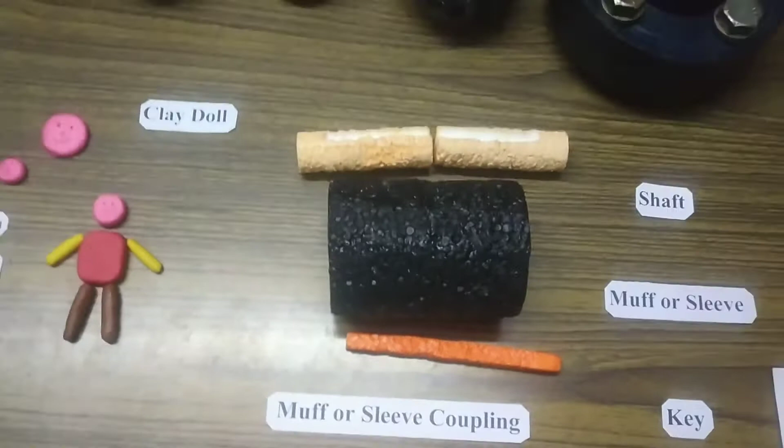So now to make you understand this concept of design, I'll take the example of a clay doll. Imagine I ask you to create a clay doll or design a clay doll. So basically what will you do? You will first create the body, then you will create the head, and then you will create the legs.

After you create the body, you need to make the head. You will not make the head too big or too small. You will not have a head which is so big, you will not have a head which is so small. What you will do is design an appropriate head, appropriate legs and then the hands.

So basically when you create a doll, first you make the body, then the head, and then the legs. The same way you will have appropriate values, specific dimensions to make the doll.

So in the same way, if I have a coupling, the coupling is basically a muff, and this muff is based on the shaft. So first you have to design the shaft. Based on this shaft we will design or create this outer muff. If I have a large shaft, I need to have a large muff. If I have a small shaft, I need to create it appropriately small in size, and then according to the shaft I'll create the muff, and with respect to both these I'll be creating the key.

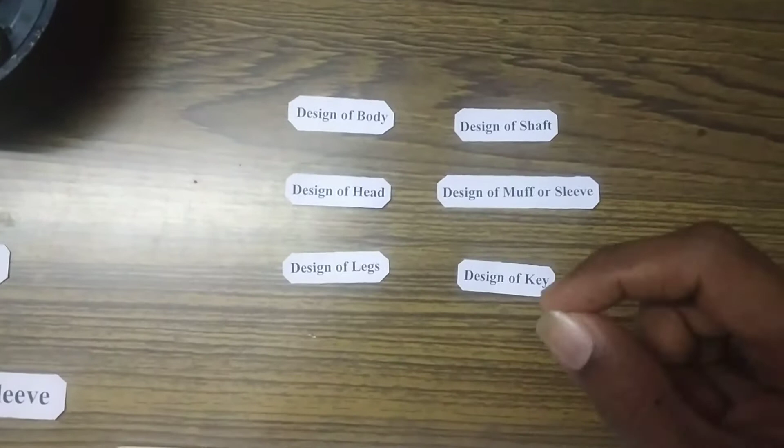So the procedure is: design the shaft first, then the muff, and then the key. As you can see, the procedure for designing the clay doll - first the design of the body, then the design of the head, then the design of the legs. Similarly in this muff coupling, you will design the shaft first, then the muff or sleeve, and then you will design the key.

So the same way, let us see the procedure, the method for muff coupling. It is very easy. I'll show the details, the procedure first, and then we'll solve the problem. So here first we design the shaft, then the sleeve or the muff, and then the key.

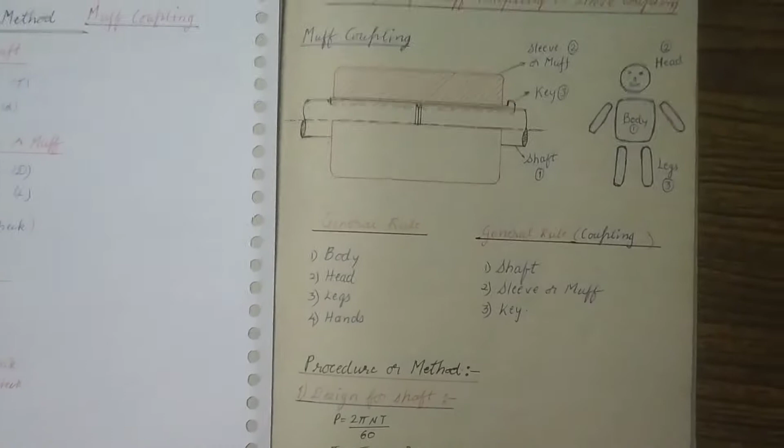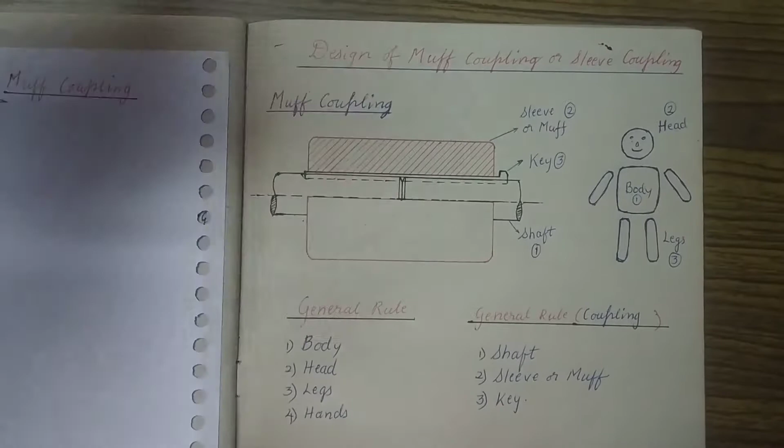So let us see the muff coupling now. Design of muff coupling or sleeve coupling. I have drawn the diagram here. This is the outer sleeve which you just saw. This is the shaft, and this long thing is the key. I have written here the sleeve or muff, the key and the shaft.

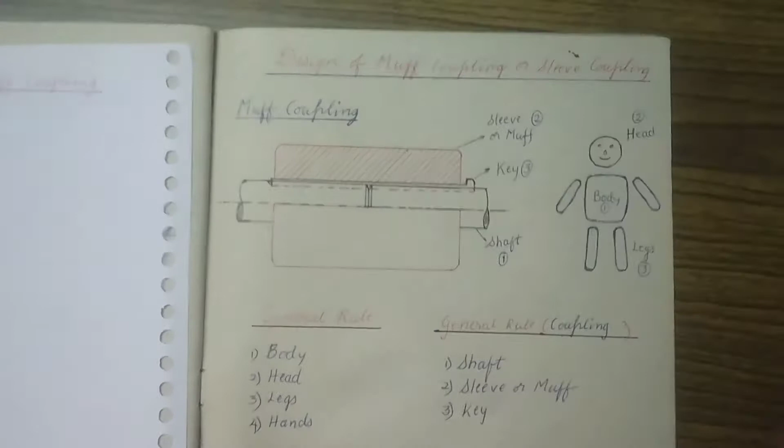As you all know, first we created the body, then the head and then the legs. So here also the same thing: first the shaft, according to the shaft we create the muff or the sleeve, and then according to both of them we design the key. This is a general rule - body, head and legs - it is just a convention. So first we will design the shaft, then the sleeve, and then the key.

So the procedure here: first, when I go for design of the shaft, I will have to find the torque first. In the question they'll give you the power. Using the power you have to find the torque, and using the torque equation you have to find the diameter. As to how we'll do this, you can see in the further solving of the problems. It is very easy, just you need to remember these 3 points.

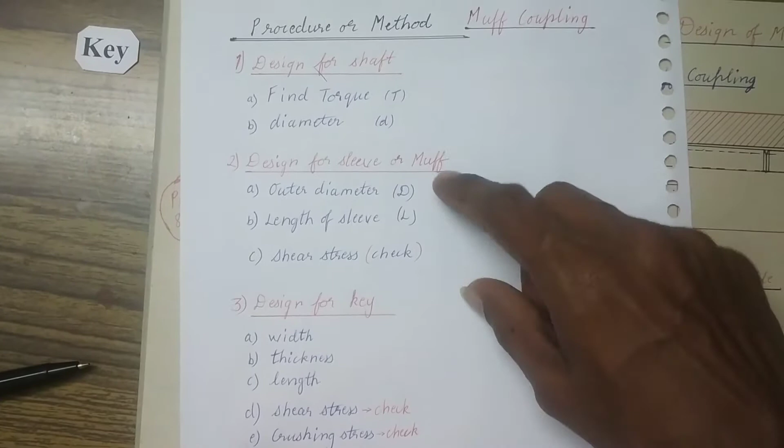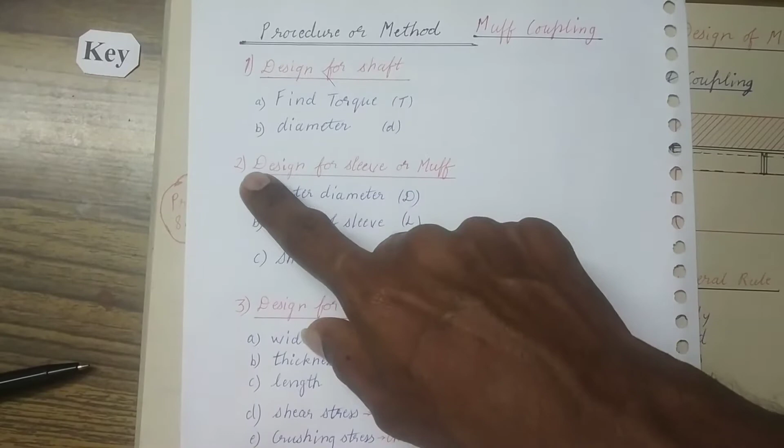So after finding the diameter of the shaft, once you find the diameter of the shaft, using that diameter you will be finding the second point, which is design of sleeve or muff. That is the second part, the design for sleeve or muff.

So when you want to design that, you will use this diameter and find the outer diameter of the sleeve based on that, and then you will find the length of the sleeve, and then you need to check the shear stress. What is the shear stress? I'll just show you while solving the problem.

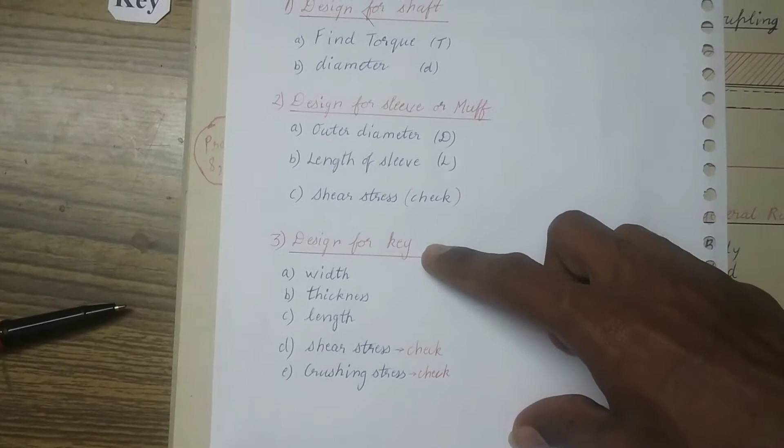Then we go for design of the key. Based on the shaft values, we will design the key. This key will have a certain width, a certain thickness, and a certain length. So we need to find these three values, and after that we'll check the shearing stress and crushing stress. What are these? We'll see with the problem.

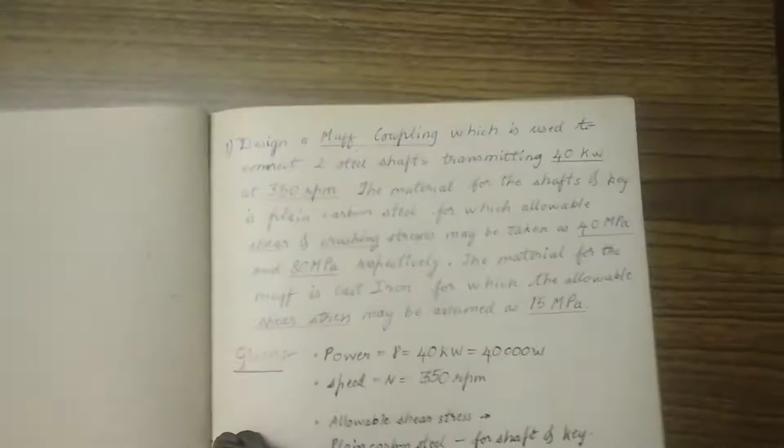So you basically have to remember three things here: design the shaft first, then the muff or sleeve, and then you can go with the design of the key. So it is very simple. Let us see the procedure.

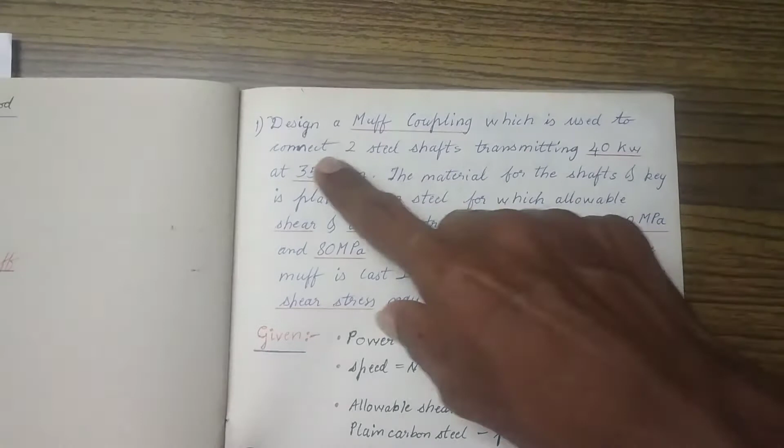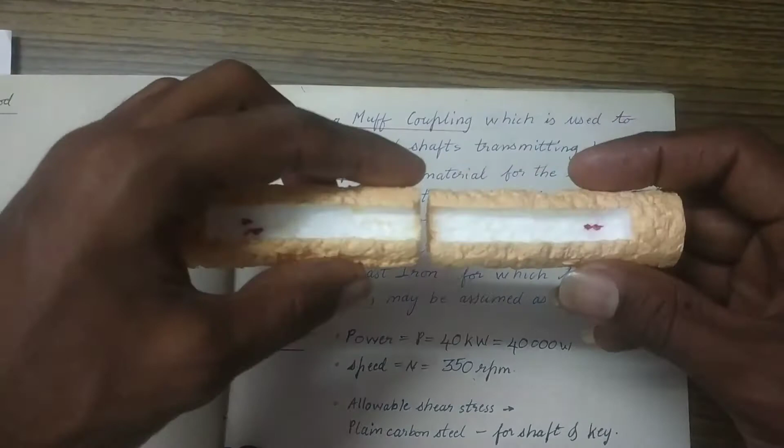Design a muff coupling which is used to connect two steel shafts transmitting 40 kilowatts at 350 rpm. So this question states, design a muff coupling used to connect two steel shafts. As you all know, we have two steel shafts which need to be connected to transmit power.

So that power is 40 kilowatts. When you transmit 40 kilowatts of power, see here, the speed is given as 350 rpm. So the speed is given.

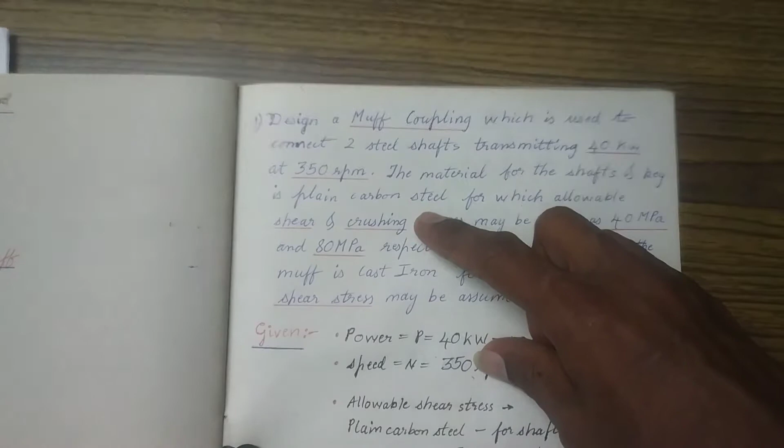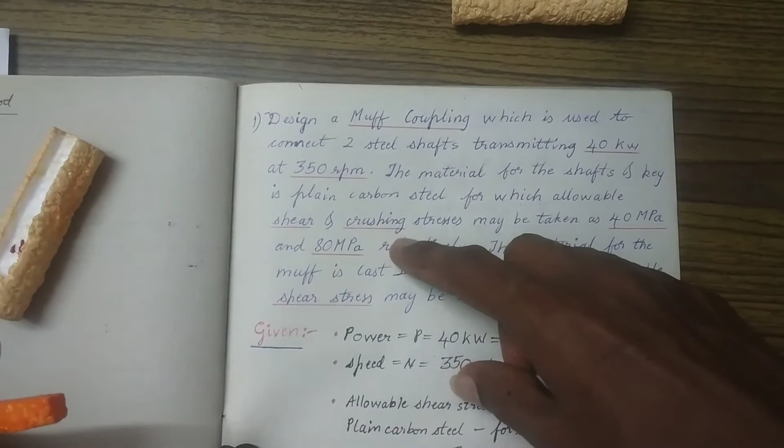The material for the shafts and key is plain carbon steel. So they have given the material for this shaft and the key as plain carbon steel, for which allowable shear and crushing stress may be taken as 40 megapascals and 80 megapascals respectively. So they have given you the stresses that will be induced in the shaft and the key.

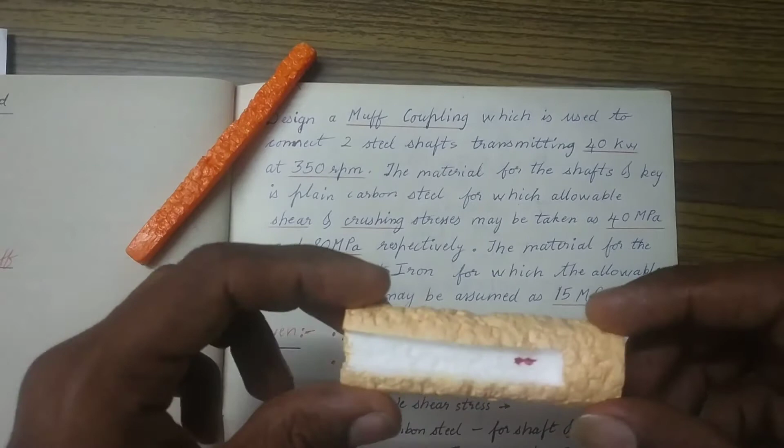So you need to see to it that when you design the coupling with the shaft and the key, the stresses in that coupling, the shaft, and the key should not exceed this 40 and 80.

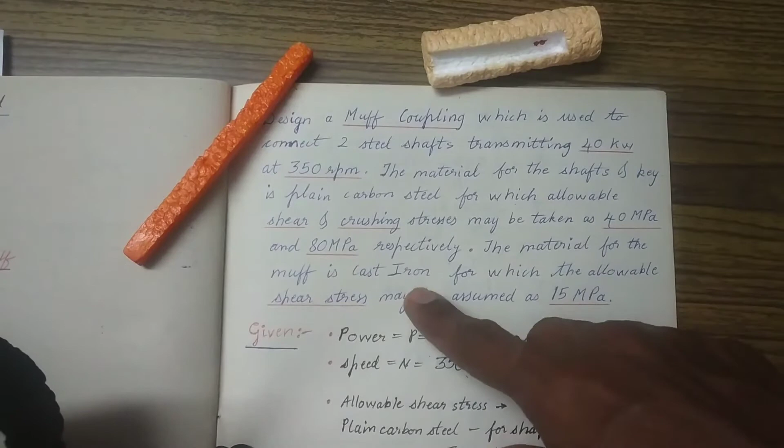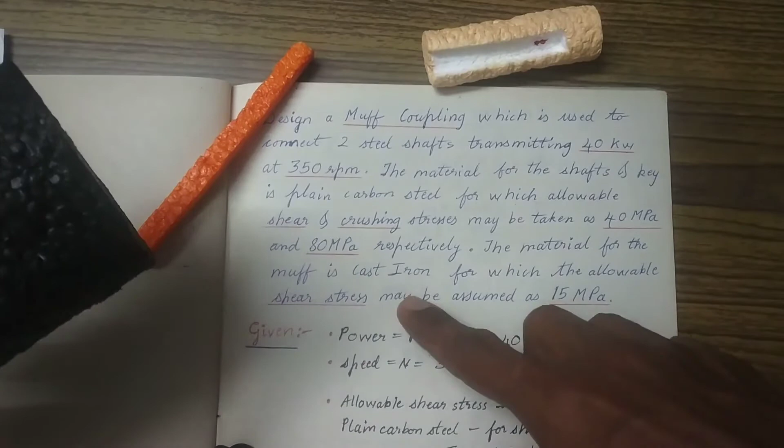The material for the muff is cast iron. So they have given the material for this muff as cast iron, for which the allowable shear stress will be assumed as 15 megapascals. They have said that this sleeve or muff is manufactured from cast iron, so the stress in this should not go more than 15 megapascals.

So let us use the calculations and see how to design this coupling. Now they have given you the values, and using the values you just have to design it.

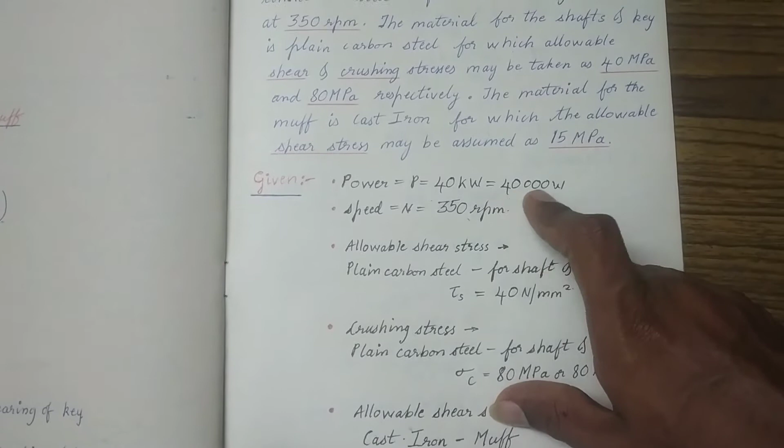So first let us write the given data here, initially the same thing which is given in the question. Power is P, 40 kilowatts, or that same thing can be written as 40,000 watts. Next is speed, N. You can use any notation for speed, but textbooks refer to it as N, so I have written it as N. So N is 350 rpm, that is revolutions per minute.

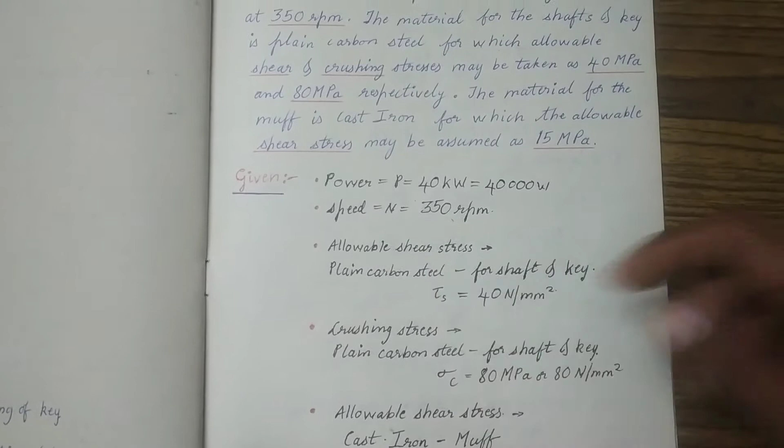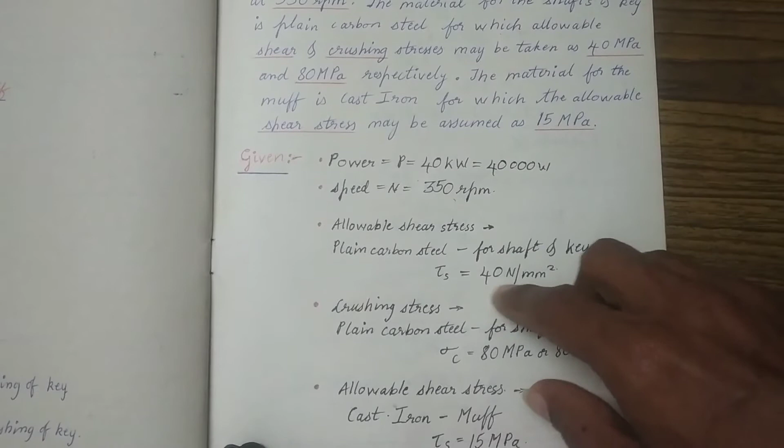Allowable shear stress, you all know what shear stress is, we have discussed this in class. So this shear stress which is allowable in the material for shaft and key is 40. It means that when the shaft is rotating, whatever shear stress is in the member should not exceed this allowable value of 40. So you cannot have more than 40 Newton per millimeter square, or megapascals, both are the same.

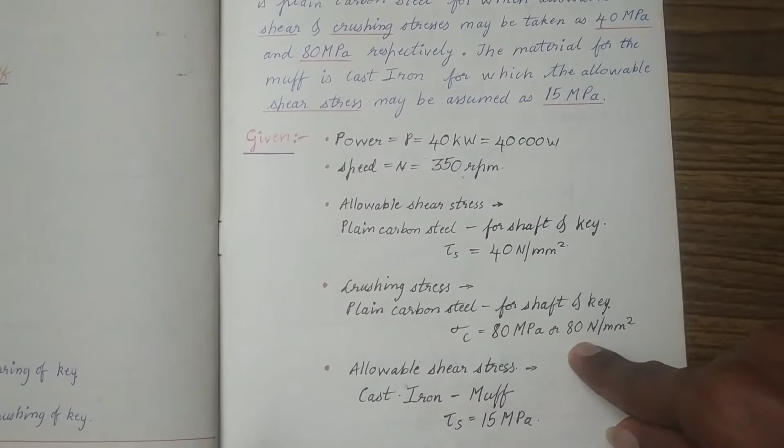Crushing stress is basically about the key or shaft getting crushed. The key gets crushed when there is a huge amount of stress. So this crushing stress they have limited to 80 megapascals, or 80 Newton per millimeter square. This stress should not cross 80 Newton per millimeter square.

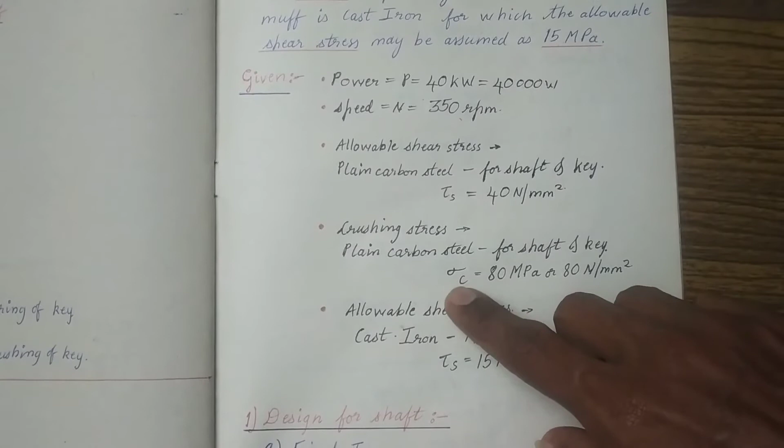Next is allowable shear stress in cast iron muff. This is all from the question itself. Shear stress tau S, you can take any notation here. For crushing I have used sigma C. You can use any other notation if you are comfortable with that, but just make sure you properly substitute the values in the equations.

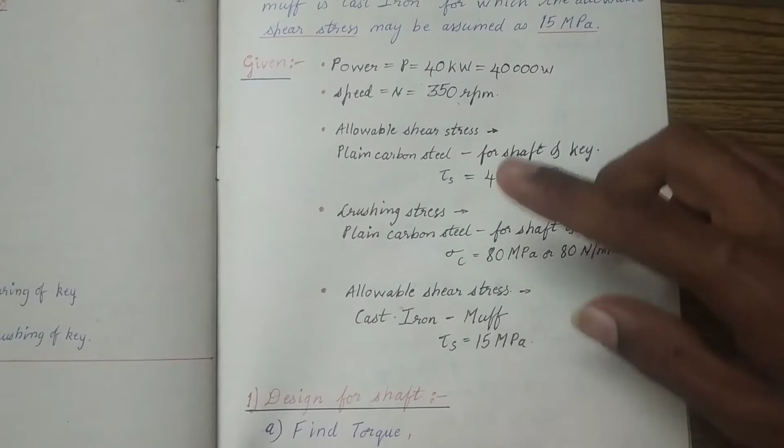So here it is tau S, allowable shear stress, maximum allowable shear stress in the muff is 15. It should not go more than 15. So now let us design the shaft.

So you all know design for shaft in this. Okay, first point is design for shaft.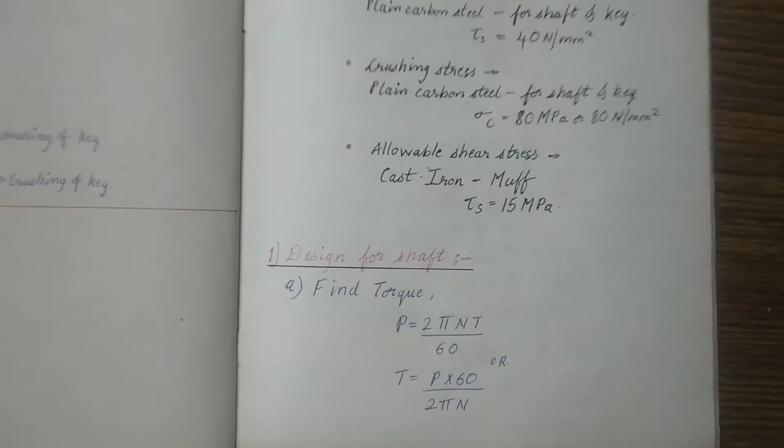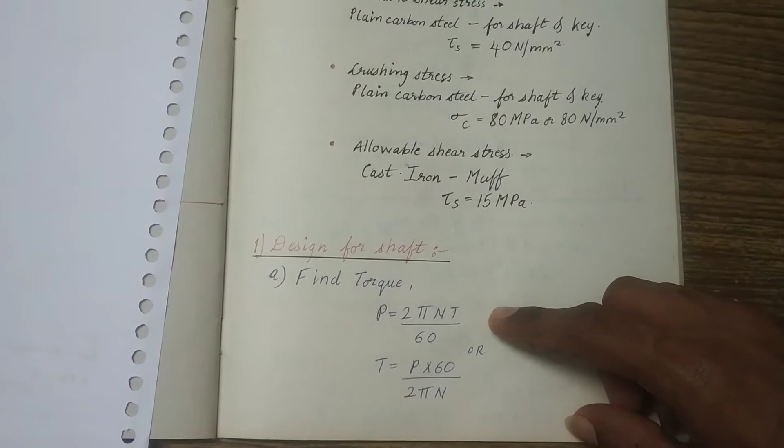So now, as you can see here, we have given written the given data. So now we'll be writing design for shaft. First we'll design the shafts. First one, you need to find the torque. As you all know, this equation is in the handbook. As to how to use the handbook, we'll discuss in the next videos. Right now we'll just understand how to solve the problem. So design for shaft - how to design the shaft?

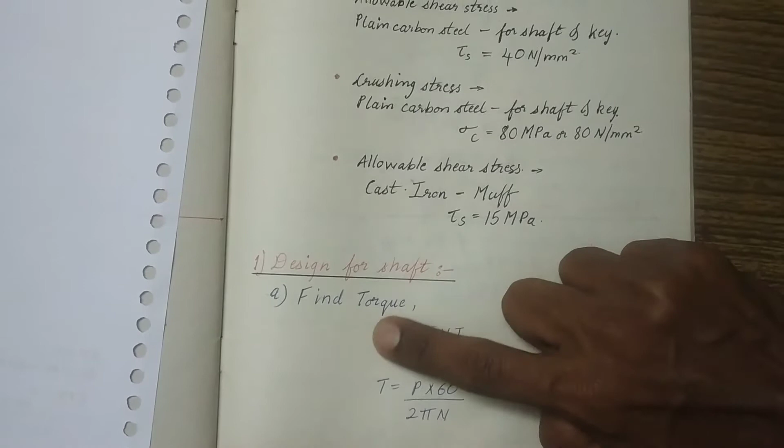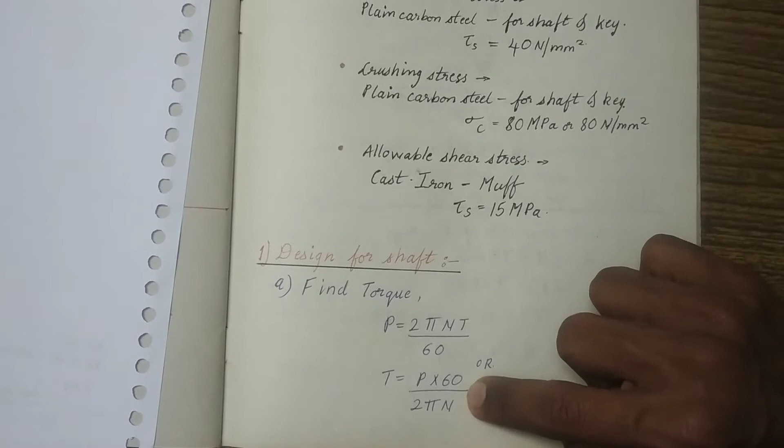You will not have given the torque, you will have given the power. So using the power, you need to find the torque. How to find it? P is equal to 2 pi nt by 60, is the equation which you all know already. So you have the P with you, you have the speed n given to you, you just don't know the T. So you can write the equation in this manner also. Take the 60 this side and put all other things down. T is equal to P into 60 by 2 pi n. This equation can be written in this form also.

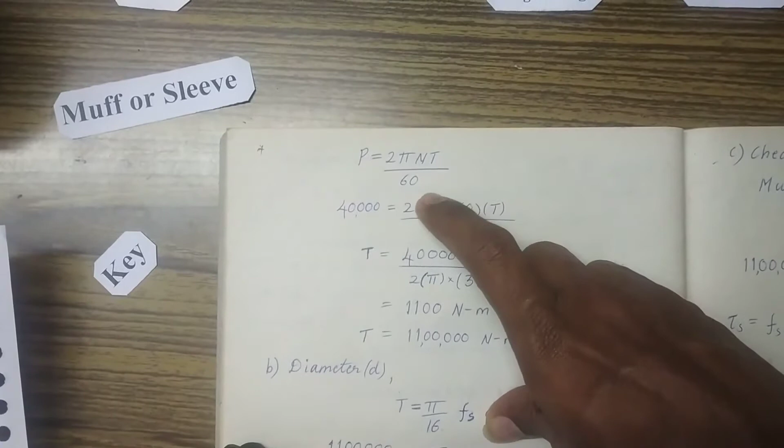Or else you can just substitute the values and later on you can shift. See here, the same equation I have written once more. P is equal to 2 pi nt by 60, is the equation. You don't need to memorize all these equations.

The equations are available in the handbook. So I'll just write the values. P, what is the power? 40,000, which we just saw, which we have just written down. 2 is written as it is. Pi written as it is. N is speed, it is 350. T is written as it is. 60 is written as it is.

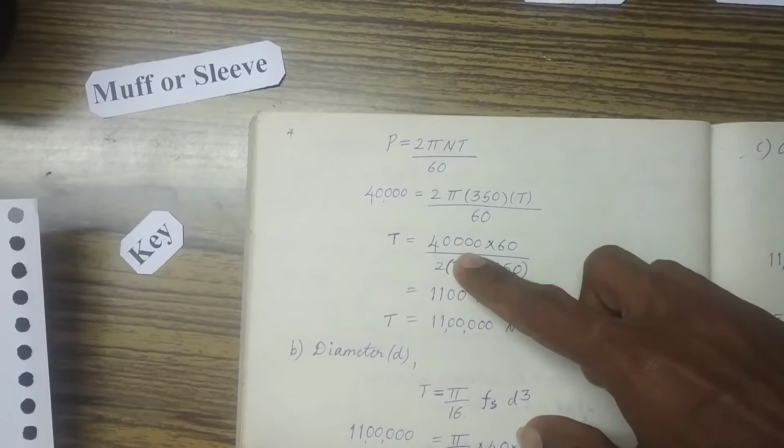So now I need T. So I just shift 60 here and take all these three on the bottom. So I get T is equal to 40,000 into 60. This is easily understandable. 2 pi into 350. I have written it as it is. So after you solve this in the calculator, you will be getting a value 1100 Newton meters.

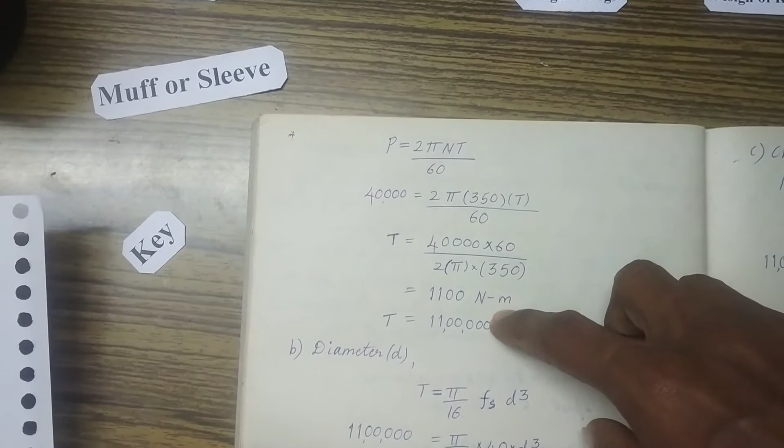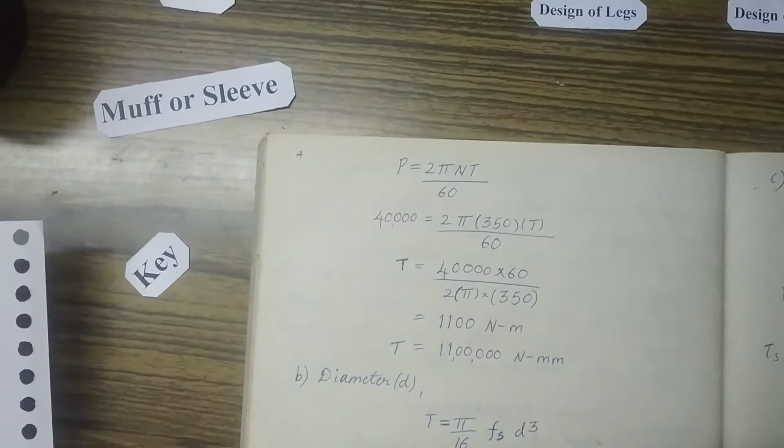This is in Newton meters. 1100 Newton meters. So this Newton meters, I'll just write it in millimeters. T is equal to 1,100,000 Newton millimeters. So when I convert this meter to millimeters, I get 3 zeros here. So what do I obtain now? I obtained the torque. Torque is what? The twisting force. When the shaft is rotating, there is some twisting force acting on that. This twisting force is nothing but this torque.

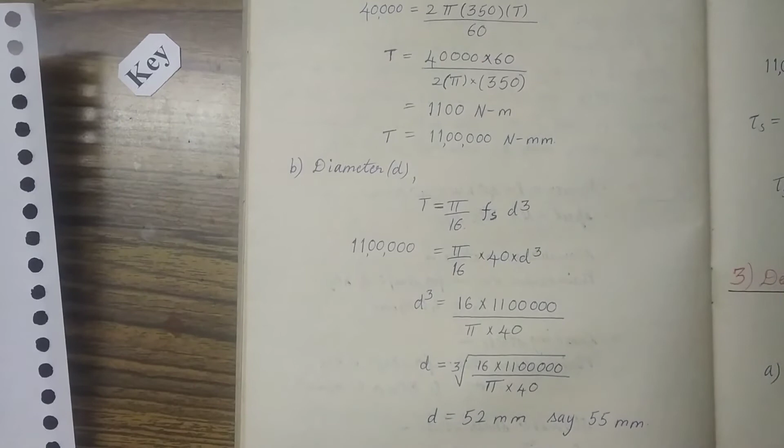So I obtained the torque value now. So once I have obtained the torque value, based on this value, I'll be able to find the diameter. So you all know this equation, we have this equation in the handbook. Diameter D - as to where these equations are in the handbook, we'll discuss in further videos which I will make separately for referring the handbooks. First, let us understand solving the problem.

So the equation for torque transmitted by a shaft, that is T is equal to pi by 16 Fs d cube. This is the formula for power transmission through a solid shaft. You all know this equation, you have used it in strength of materials. So I just put this torque value here. Pi by 16 written as it is.

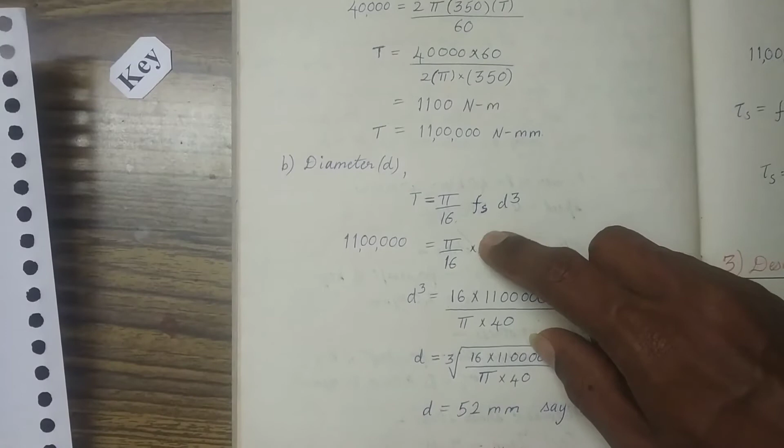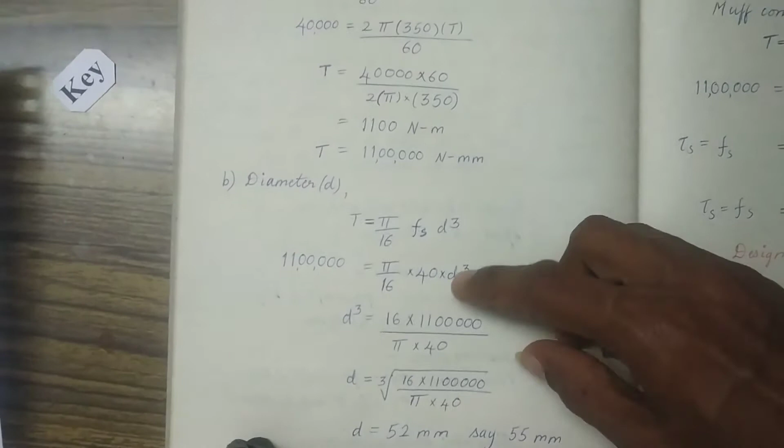Fs is, see here now, this is a very important point. Fs or tau s, you can use any notation here. Fs is nothing but the same thing - allowable shear stress for shaft. It is 40. This 40, I take it and I put this 40 here. So we are designing the diameter for the shaft, so we have to put the value for the shaft, that is 40. So write the 40 here.

D is the diameter, which I don't know - that is what I'll be finding out. So then keep D here as it is. Take this 16 onto the other side, 16 into this torque, I've written it here. And these two go on the bottom. So 16 into the torque divided by pi into 40. Here I have D cube. This cube goes on this side and it becomes a cube root.

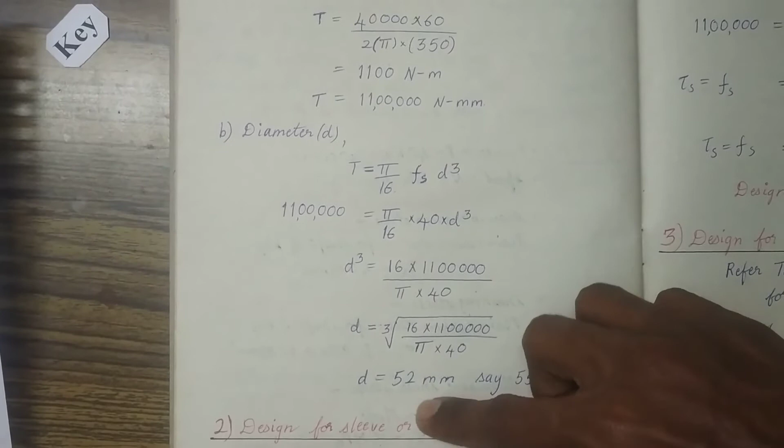So you solve this whole thing in your calculator, you will be getting the diameter as 52. You can take it as a round figure, 55 mm. So now what did you obtain? Just here you obtained the value of diameter of the shaft.

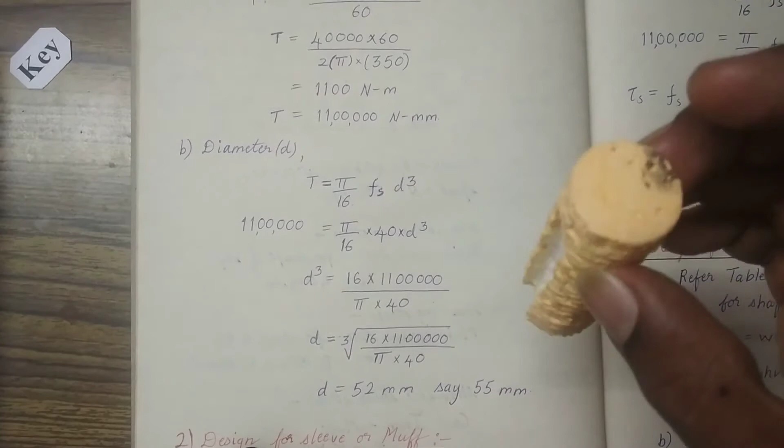If I want to transmit this much amount of torque, which is obtained by this power, this is the torque which is available. To transmit this much amount of torque, I need the diameter of the shaft to be 55 mm. So now you understood the diameter of the shaft.

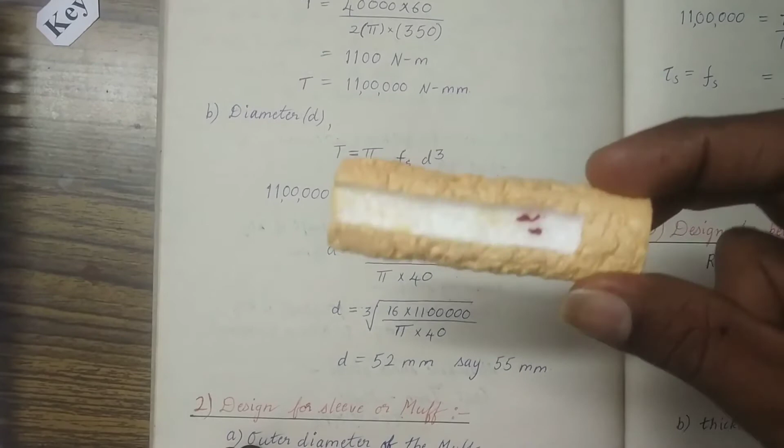So this is the first part which we understood now. So what we have found out now, if you see in the procedure, design for shaft, first we found out the torque, then we found the diameter. So we have got the value of diameter for the shaft now. This is over. So let us see the design for sleeve or muff.

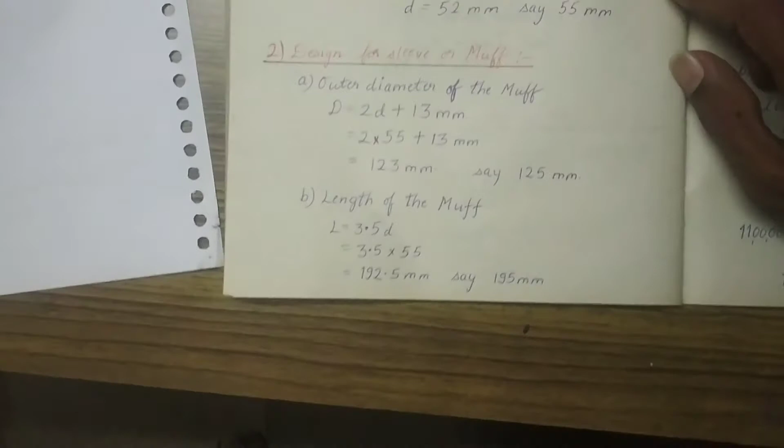The next one is design for sleeve or muff. So first we need to find the outer diameter of the muff. There is a formula given in your handbook which we'll see later on. First let us see the formula. What is the formula here?

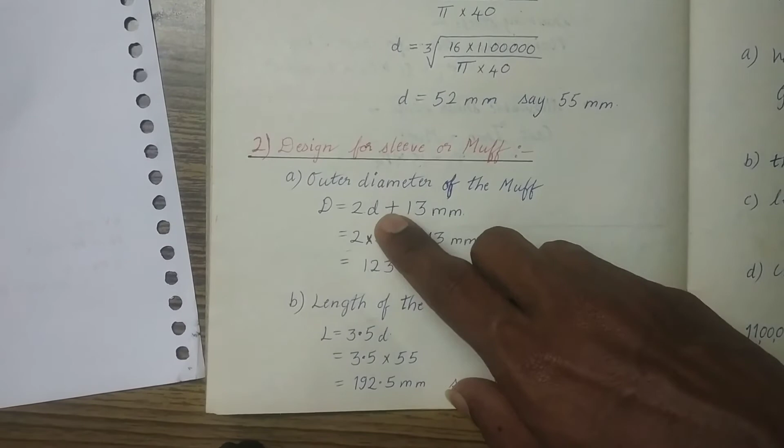The outer diameter of the muff is given by capital D is equal to 2d plus 13 mm. As to how these are obtained, we will discuss in the classes. Right now we will just see solving the problem.

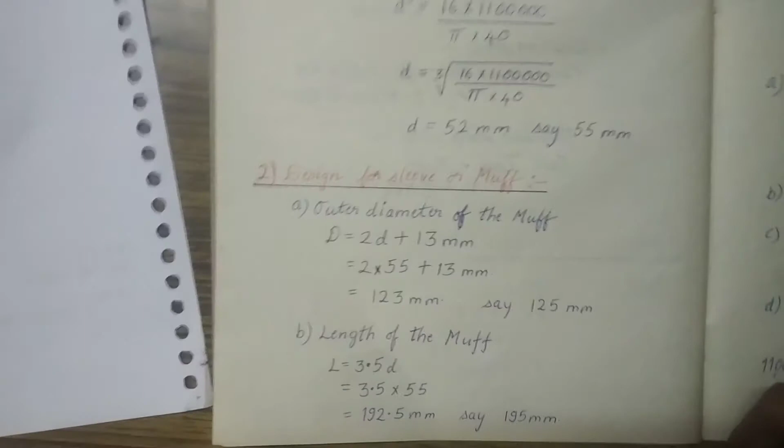2 is written as it is. D is small diameter, that is the diameter of the shaft, which we have already obtained here, 55. The same thing I'll write here, 55. As I told you, we will design the muff based on the shaft.

So now I need to use the diameter which I have designed here. Take the 55 here, 2 into 55 plus 13 mm. So I'll be getting a value 123 mm. You can round it off and say 125 mm, that is a round figure. You can take the higher value, 125 mm.

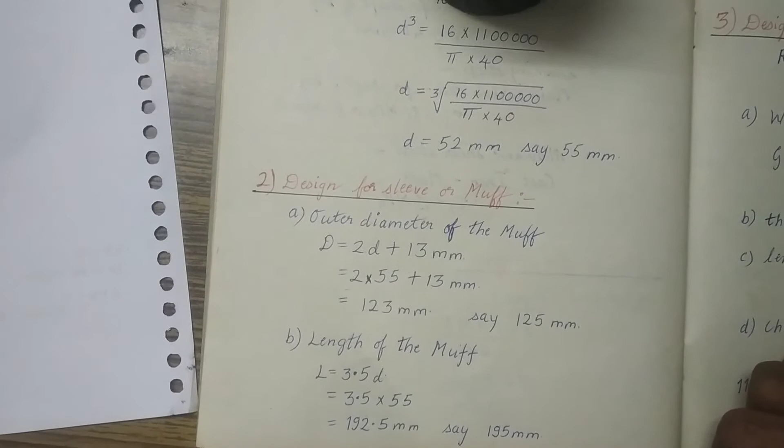So then the next one is length of the muff. The formula for length of the muff, to find the length of the muff, this is the length of the muff. Now we found out the diameter of the muff. Now we'll find out the length of the muff.

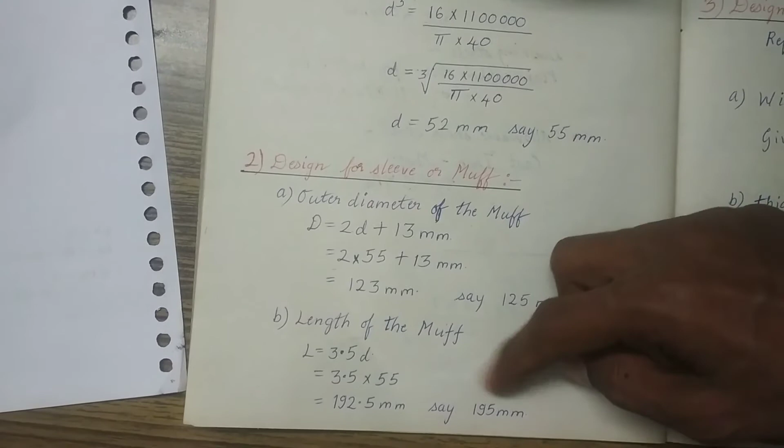So length of the muff is L is equal to 3.5d, that is D is this 55. I just put it here. I get the value 192.5 mm, and you can just try and round it off. 195 mm. You can take the higher value.

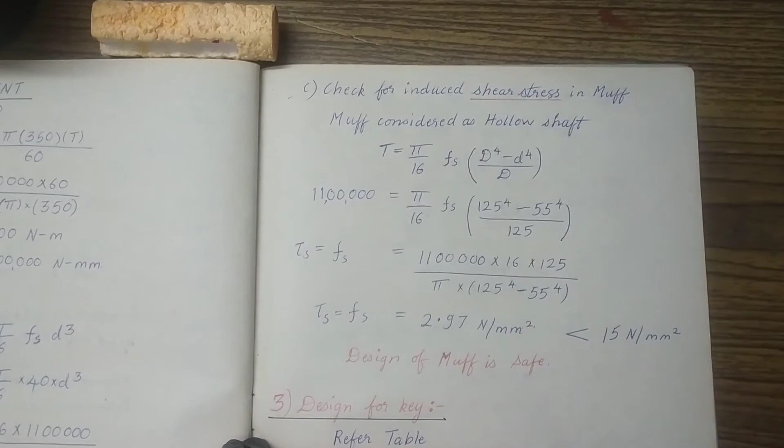And then now a very important point: check for induced shear stress in muff. Okay, this is a muff.

Now what you need to do here is, you all know that the muff is rotating along with the shaft. So if you can see, when I have the shaft and the key inside, this is the way it is fitted. So when this starts rotating like this, in this way, there is shear stress. You know what is shearing stress already, we have discussed in the class. So when there is rotational motion, there is shear stress induced in this part of the muff.

So we need to check whether the shear stress induced in the muff for the values which we have designed is more than 15 or less than 15. If it is more than 15, then we need to change. If the value is less than 15, then it is not a problem because it is safer. So let us see that.

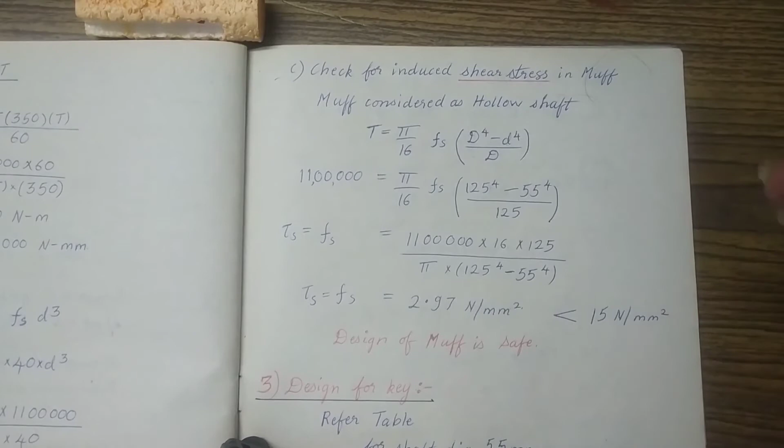Check for induced shear stress in muff. See, they have already given you that the stress should not cross 15. Allowable stress is 15, which you already seen. We have seen here, the stress for the muff, shear stress, is 15. So the value should not cross 15. So we'll just see whether it will cross 15 or not.

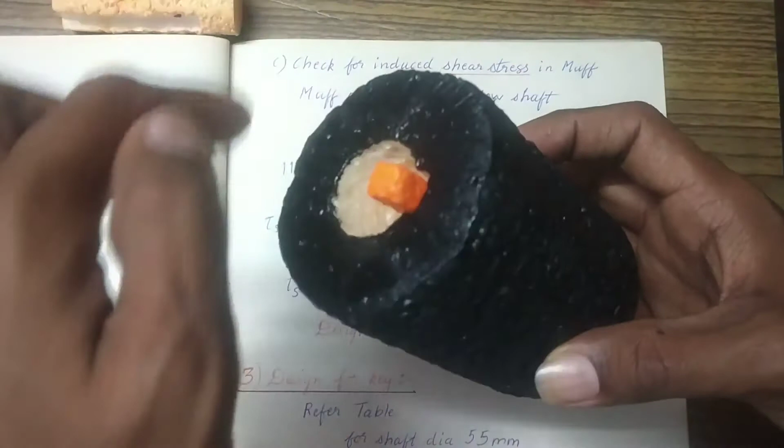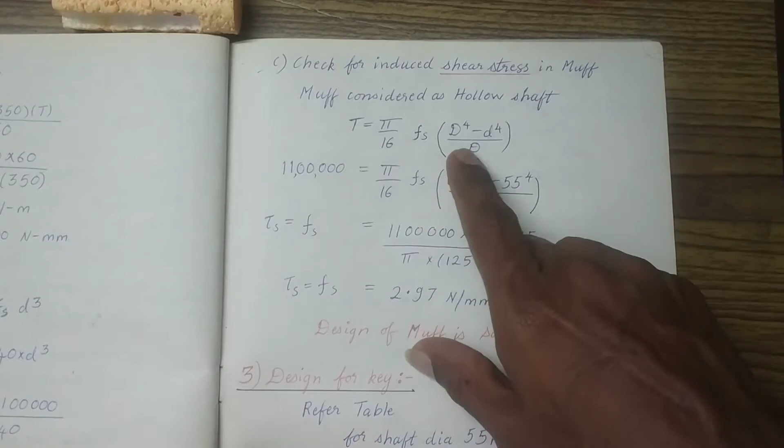Check for induced shear stress in muff. Muff considered as hollow shaft. So if you see this muff, it is basically a hollow shaft. So we will consider the muff as a hollow shaft, and then you all know from your strength of materials subject, the equation for a hollow shaft is T is equal to pi by 16 Fs, D, capital D raised to 4. Capital D is the one which you designed.

Capital D is the diameter of the muff, and small d is the diameter of the shaft, that is the inner diameter or the shaft diameter. Both are same. So D is outer diameter, small d is inner diameter, divided by the capital D, that is the outer diameter. So this is d raised to 4 minus small d raised to 4 divided by D.

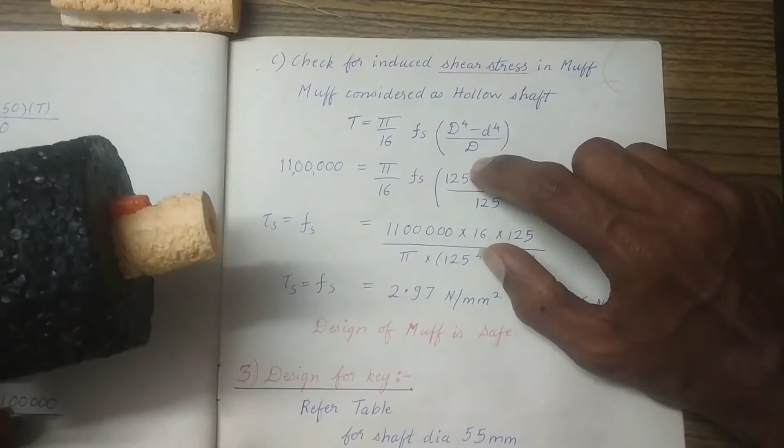So we'll just put the values here. T is torque, which you all know, so basically we'll be designing for the same torque. Write the same T value down. Pi by 16 Fs, we want to see what will be the value of Fs here. What is Fs? That is the shear stress. You can use the equation tau s, Fs, or any other notation which you feel you can remember easily. I have written Fs here, but you can use Fs, tau s, anything.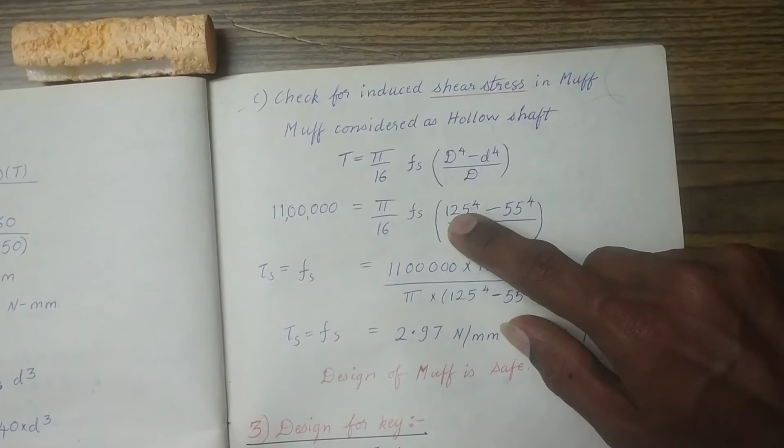So D, capital D, which we just designed here, as you saw, it is 125 mm. So the same thing I have put here: 125 raised to 4 minus 55 raised to 4, divided by 125. I've just put the values here, and then we need to find out Fs or tau s, anything.

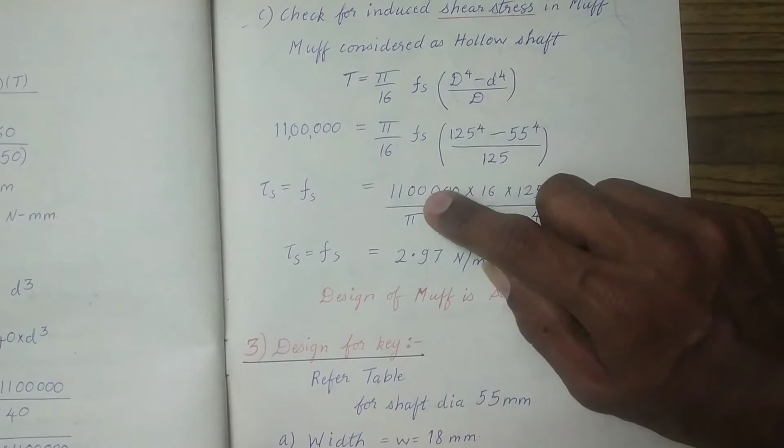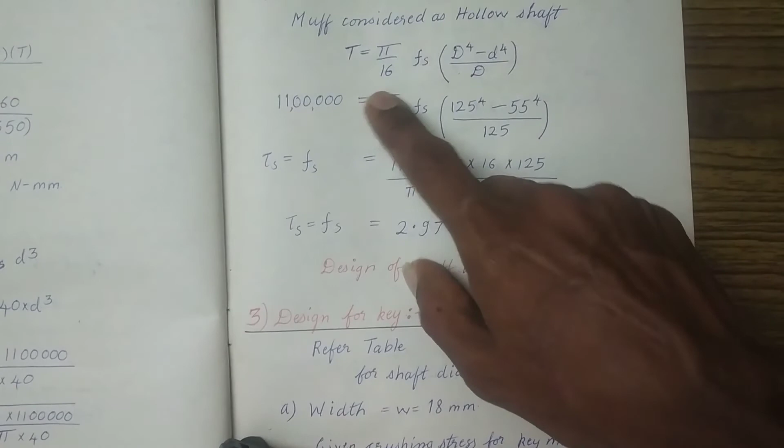I want to find this, so keep this here, transfer all other things to the other side. 125 and 16 go on the top here, this into 16 goes here, 125 goes here, and the remaining things, pi and these two things, come at the bottom. You can see here, torque, 16 is put on the top, 125 is put on the top, the remaining part, that is pi, 125 raised to 4 minus 55 raised to 4, the whole thing is put here.

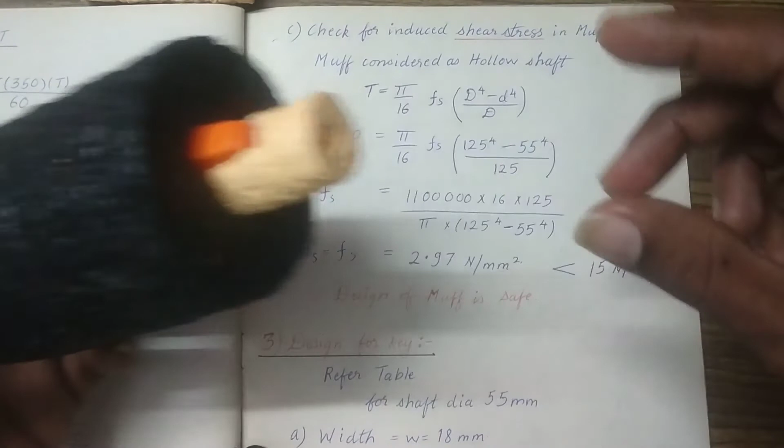So just calculate this in the calculator, you will get 2.97 Newton per millimeter square. So what does this mean? The stress which is induced in the muff, the shear stress which is induced in this muff when this shaft is rotating, the value is 2.97, which is way less than 15. So you can find that design of muff is safe.

So yeah, I think you have understood this. We have designed the shaft. Based on this shaft we designed the muff. So for this muff and this shaft, what is the shear stress induced? We got the value as 2.97, which is way less than 15. So the design of muff is safe. So the shafts which we have designed, the diameter of the shaft is safe.

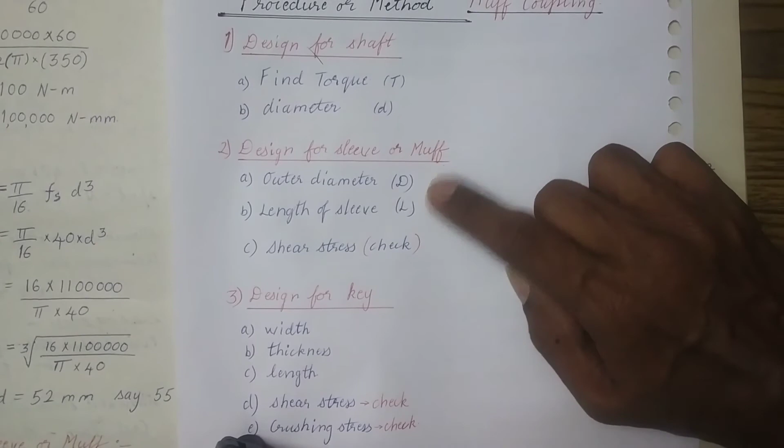Next thing is, now what would we do? We just have done this part. I hope you have understood what is checking of shear stress. Okay, so first we did this, then we did this part, design of sleeve or muff. We found diameter, we found out the length, and then we checked for the shear stress. So the last part is a simple thing.

We'll just see for the key. Design for key. Let us see the design for key.

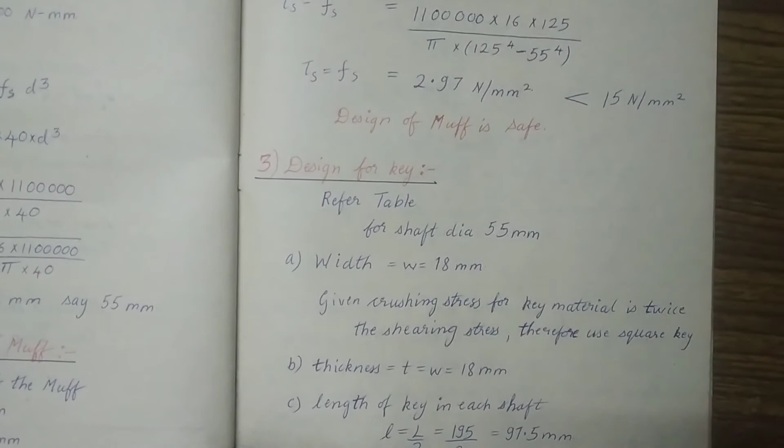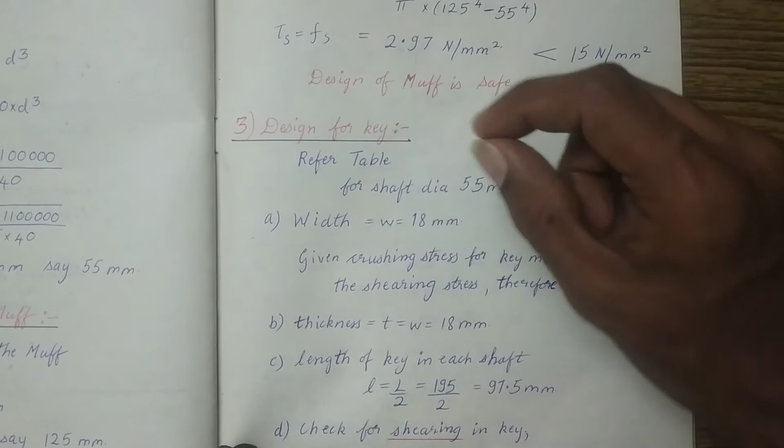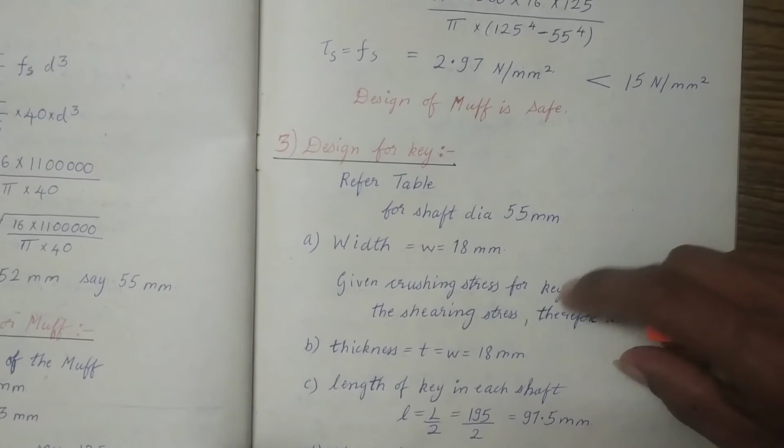So here, refer table. There is a table in your handbook. We will discuss about all those things later. Just there is a table, and in that table we will have values of width and thickness for the key given. So this is the key. For this key there will be a standard width and thickness available, which is in the handbook. So for this diameter in the handbook, I'll show you how to see the handbook later on.

So first let us understand solving the problem. For this diameter of shaft 55, width is 18. So the width of the key will be 18 mm.

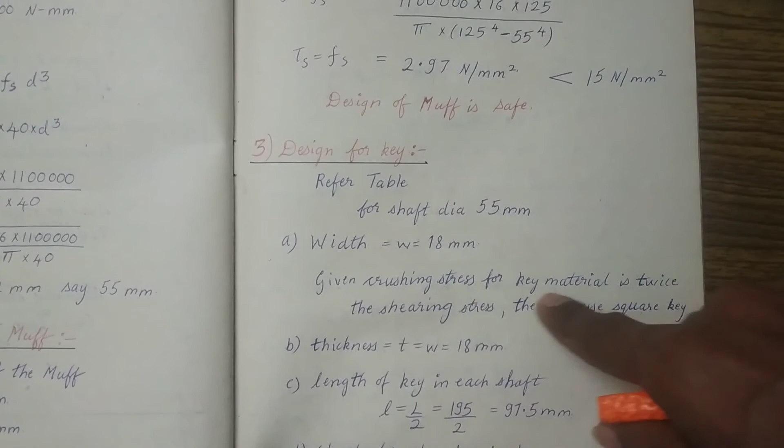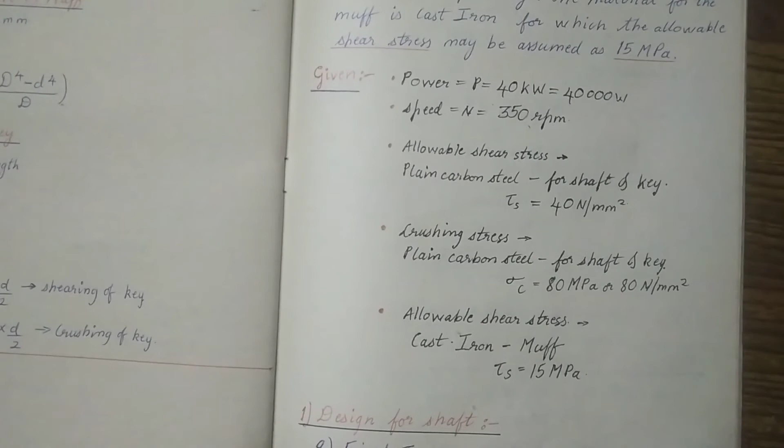Here in this problem, the crushing stress of the material is twice the shearing stress of the material, as you can see here, I'll just show you. If you can see here, the crushing stress is 80, whereas allowable shear stress is 40, crushing stress is 80. So this is half of this.

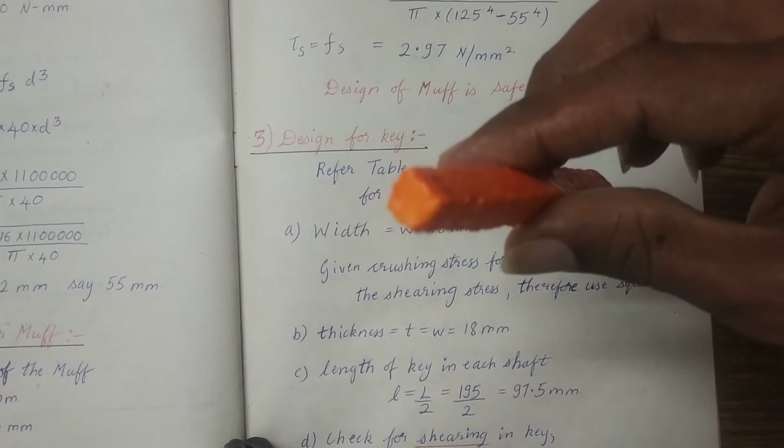So when such condition is there, what we will do is, given crushing stress for key material is twice the shearing stress, therefore use square key. We will be using a square key. As to why these considerations are done, we will discuss in the class. So here crushing stress is twice of shearing stress, so we are using a square key. It means that when the width is 18, the thickness also will be 18. So I have a square key.